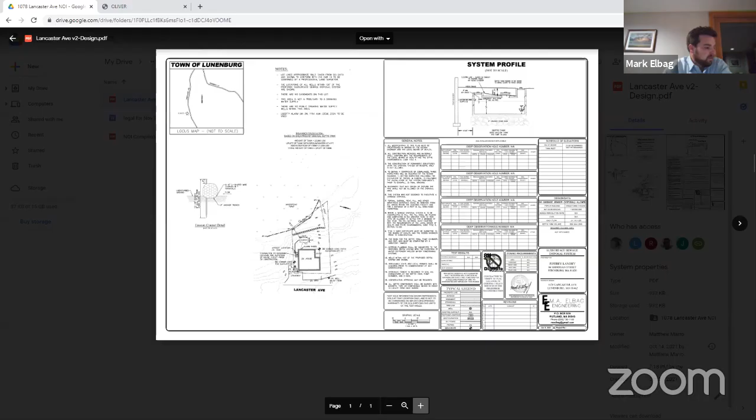It's converting basically a failed Title V system to a Title V compliant tight tank. There's really not a good alternative, and unfortunately the only feasible solution in this case is a tight tank. We kept it as far away from the resource as possible, being the downstream pond. As you can see, there's erosion control shown on the plan. We expect relatively simple construction. Really, the permitting is probably a bigger effort than the construction at this point in time. And I think the applicant's just looking to kind of get this going and get this under compliance.

All right, thank you. When are you looking to put the tight tank in? It's still with the Board of Health, but I believe as soon as possible. Okay, so you're gonna try to do it before the ground freezes up? Yeah, I think so. I think there's still that window. And like I said, it's very limited construction. It's really only a pipe and a tank. There's already a pipe with an existing tank that's undersized there now. So it's a relatively simple job. The hardest part about this job will be kind of access to the backyard.

The only concern I have, given the grade, is maybe try to beef up the erosion protection rather than just the one wattle line. That would be my only suggestion to back it up. We'd certainly look at that. It's all lawn area, and the tank's going in a relatively flat plateau in the backyard. But a second line of defense is certainly reasonable. That's my only concern as we're getting into fall, sometimes we get fairly heavy rains.

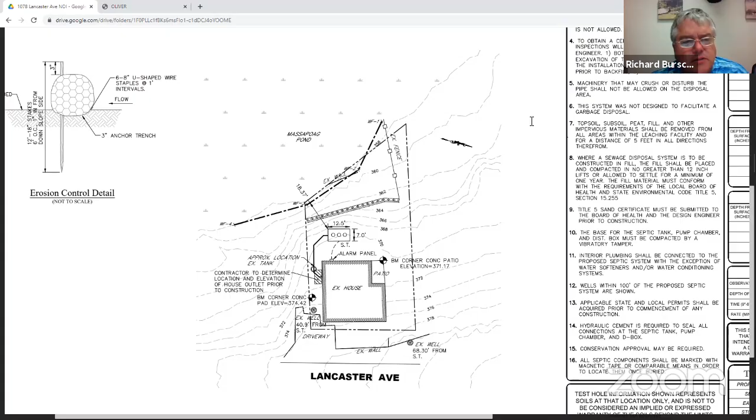Seeing none, I'll accept the motion for approval for the tight tank with an added condition of 12-inch wattles and silt fencing, staked and buried behind that. Do you make the motion, Jack? Okay, yes, I would so move. Do we have a second? Second. Mike seconds. Any other discussion?

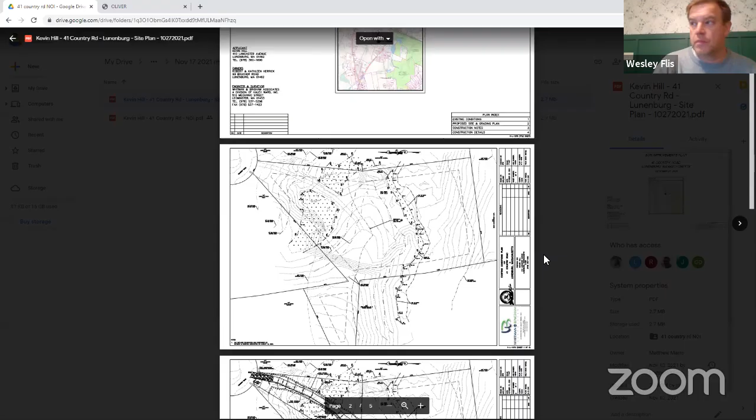You want to start with the site? Sure, we can do that. The site is a 2.57 acre property located at the end of Country Road on your left-hand side as you come up to the end of the cul-de-sac. Majority of the site is wooded. There are some wetlands that cross through the property, and also a perennial stream in the southerly portion, surrounded by some wetlands. Because of that, we have the 100-foot inner riparian zone and the 200-foot outer riparian zone, and also the local wetlands bylaw we have to abide by, being the no-touch zone, but also the 50-foot no-build zone.

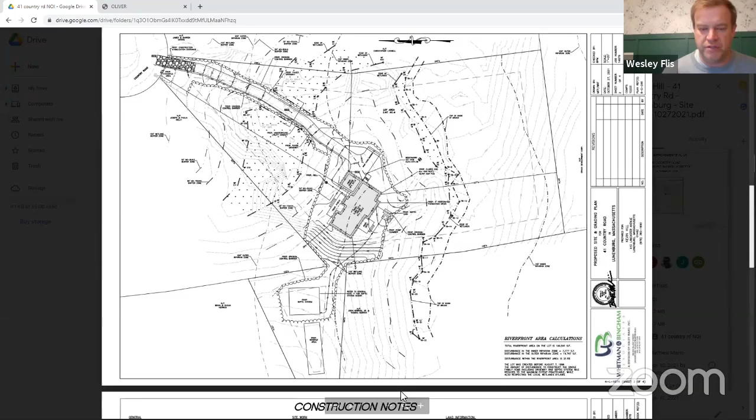So when looking at the project, what we tried doing is siting the project such that, other than just getting the driveway across to the uplands, we tried to meet the local bylaw with regards to the 30-foot no-touch and the 50-foot no-build, keeping impervious surfaces out of the 50-foot no-build zone as much as we could, other than for the driveway, and keeping that disturbance as minimal as possible. To do so, we did have to show some work within the 100-foot inner riparian zone and also the 200-foot outer riparian zone.

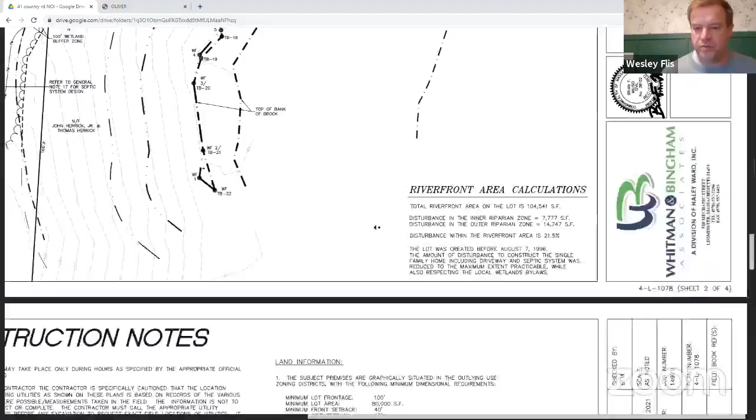The total riverfront on the property is 104,541 square feet. Within the 100-foot inner riparian zone, we're looking at disturbing about 7,777 square feet. In the 200-foot outer riparian zone, as you can see on screen, it's 14,747 square feet. Total disturbance within the riverfront is at 21.5%, which exceeds the 10% threshold, but is within the Riverfront Protection Act.

The lot was created prior to 1996, actually in 1977. There was an ANR plan that our former office did back in November of 1977 that created this lot. So this lot was created well in advance of the 1996 timeframe that DEP has.

On the plan you can see we show the well. We're showing the well within the 100-foot buffer zone, but out of the 100-foot riparian zone, within the 200-foot riparian zone. The septic system is up in the funkier shaped part of the property, where we were trying to get that out of the 100-foot buffer zone, but that will be in the 200-foot outer riparian zone.

We will have to pump up to that, so you can see in the back of the house there is the septic tank, but also the pump chamber. We're again trying to keep that out of the 50-foot no-build zone, but also keeping any disturbance out of the 30-foot no-touch zone in the back of the property, also associated with wetlands back there. You can see we show as minimal disturbance as we can associated with the house and utilities.

This is similar to the way the provisions work within the Wetlands Protection Act with regards to lots created prior to 1996. The way it's worded is: notwithstanding the provisions of 310 CMR 10.58(4)(d)1 or 2, the issuing authority shall allow the construction of a single-family house, a septic system if no sewer is available, and a driveway on a lot recorded before August 7th, 1996, where the size or shape of the lot within the riverfront falls under 310 CMR 10.58(4)(d)1 or 2.

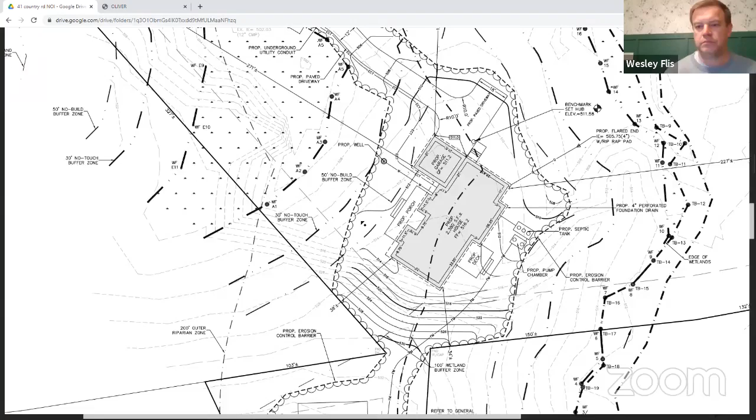There are concerns. Essentially, the first is the intermittent stream. There was a pipe underneath that drive area, the intended drive area, and the stream was flowing. We're interested to see how you plan on handling that in terms of erosion controls, and what that pipe will look like, because we are not looking to touch that pipe.

We're not looking to do any real grading over that crossing. We're looking to keep the grade of that crossing the same as it is now.

Right. So you're putting gravel on and some tar over that, but you're not going to interfere with that pipe at all? That's the intent there - not to touch that pipe. Okay, so you're leaving it intact.

Okay, yes. The next question was - we went further up the hill and ran into the tributary of the Mulpus Stream, and it was running very well. I'm interested to see how close you're going, since we've got a 200-foot buffer, right? I'm not totally able to understand your map, and I'm not seeing the river located on your drawing.

So we show top of bank shots - you can see TB2, TB3, all the way through. Top of bank? Yep, that's the river. So that's the edge - that's the project side of the river.

And so that's what we had flagged. We also have the wetland flags associated with the top of bank, which is closer to the development. Off of the wetlands we show the 30-foot no disturbance zone, no touch zone, and also the 50-foot no build zone. So where's the 200-foot?

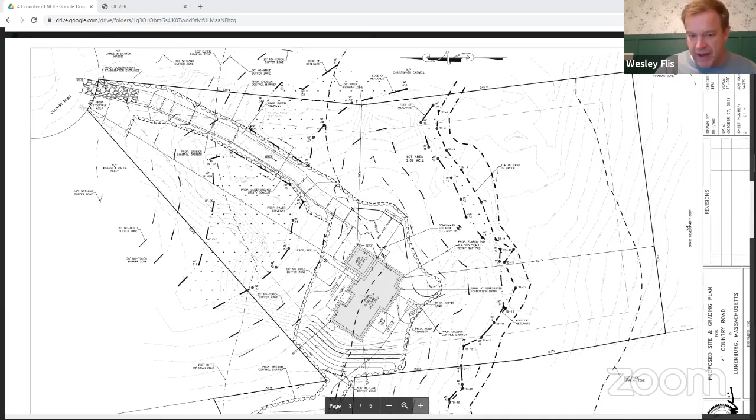So what we were looking at, if you're walking the property on the back of the house, there's a ridge line that separates where the back of the house is from the stream. So when we're looking at siting this house, you can see we're proposing a swale in the back of the house.

And so what we were trying to create there was similar to what it talks about. So the wording on the section here is proposed work which does not meet the requirements may be allowed if the applicant can provide an undisturbed vegetation with an overall width or length of 100 feet.

And so what we were trying to provide there was a swale of a length of 100 feet from the back of the house to the stream. Because there is that knoll in the back that we're not looking to cut down, it's actually going to create a swale of 100 feet for that water to have to run before it reaches the stream.

So yes, we are doing work within 100 feet of the stream, but there is still about a 100-foot, if not greater, length of run there in the back of the property for that water that comes off the back of the house to run before it reaches the stream. So that's another thing we're looking at in the back, to create that swale to provide for that.

So I'm most sensitive, and I'm speaking for myself, not for the whole committee. I'm most sensitive to the mulpus itself. And at the same time, that intermittent stream does eventually join up with this particular part of the mulpus stream.

If you can somehow look at turning it sideways a bit, I wouldn't have a problem with you going into the 100-foot on the left-hand side. I would consider that because I think it would have less of an impact.

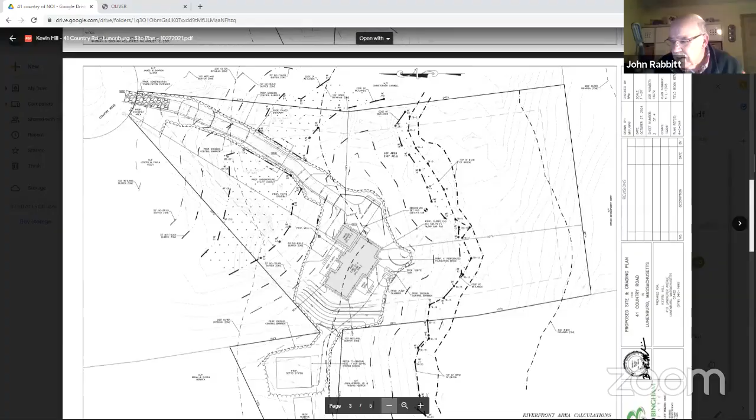Say that again, Mike? There was a dumping site either on the right-hand side of this property, or had I crossed over to the other side? Is that something you're familiar with, Wes? I'm trying to call it up now, and I don't know.

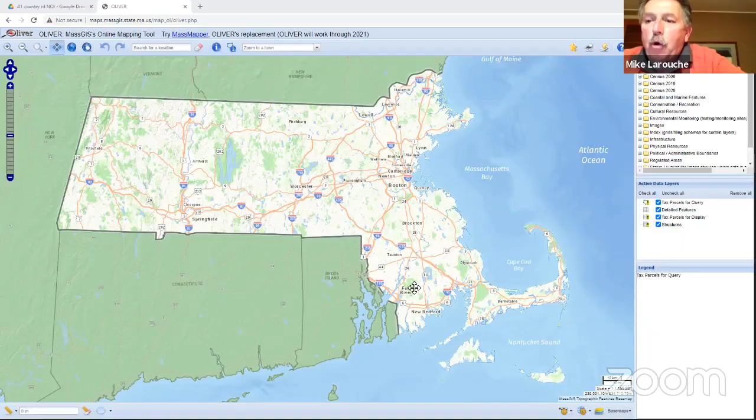Yeah, it doesn't show up. There was some old trucks that are all rusted out and tires, and it looks like it's been a dumping ground for a long time. So I was just curious to see if it was on that particular site, given that some of the markers were not that clear on whether we had gone over through the far site or whether or not it was on that site.

Hey Rich, I can give you pictures if you give me the screen. I don't know if I'll be able to return it to you, but...

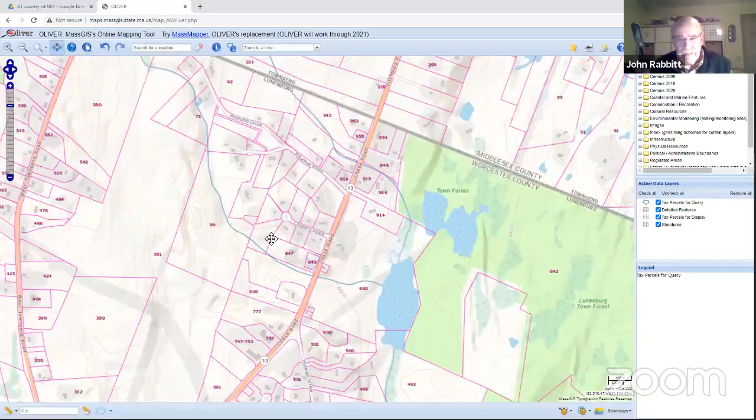Is this what you're talking about here, Mike? Possibly. Was it that close to the road? It was closer to the Mulpus, so it would have been out on the stream side? Yes. Okay, I'm not seeing much, and I don't remember, it's tree covered.

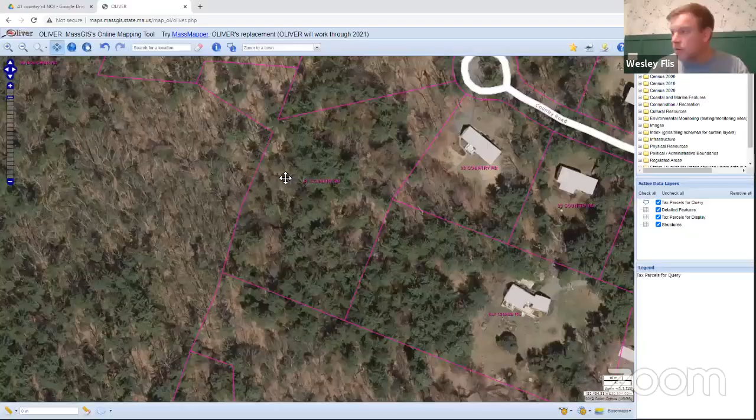Something we can put in as a special condition also, if we move forward tonight, any dumping or debris to be removed. Yeah, I don't think the client would have an issue with that.

So you think it's out in the back here, Mike? Because this is Mulpus. Yes. If you're looking at the building, I thought it was on the far right side.

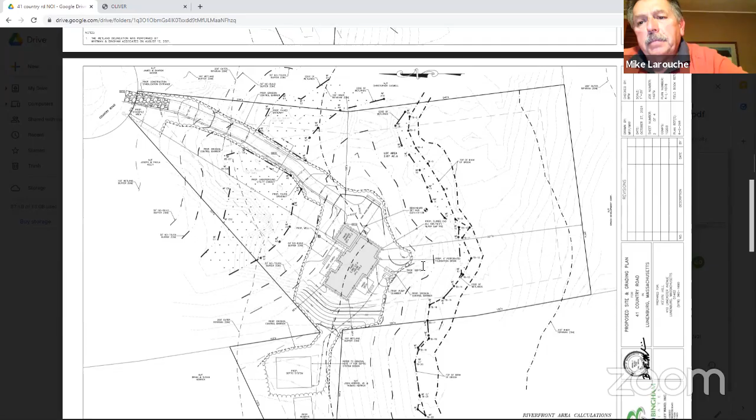Was it flat or was it hilly where you saw him? Just because it's a fairly good grade going up here and then dropping back down. I think it was right where it started going down. Okay, it was, Mike. All right, we can make a notation if we move forward.

Hey Wes, I did have a quick question on the house. Sure. If we took the garage, slid it east, and then took the house and slid the house so that the garage would be on the end of it instead of on the side of it, that puts the majority of your house in between the 50 and the 100-foot riparian.

Yeah, some of it. There is a porch on the front there, though. Now, is it a covered porch? What are we looking for here? It is, there's a roof to it. Okay, so we'll probably eliminate that and just have the stairs going up to the front.

Yeah, I'll have to. I don't know if, because that would alleviate quite a bit of the angst, I think, if we move it, it looks like we can probably move 15 feet. And at 30 feet, that's about what you've got in the riparian zone in the back.

Or at least some deck of in it, yeah. Back, is the deck in the back going to be covered? No. Okay, so I personally don't have anywhere near as much of a problem with an open deck in the back in the 100-foot inner riparian.

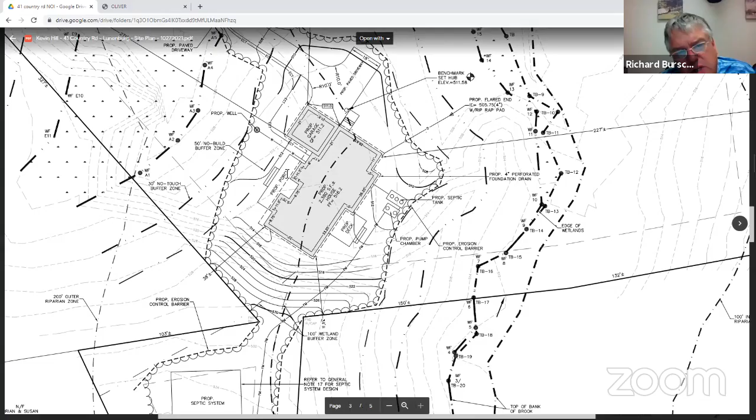Yeah, but that would move quite a bit. That moves the tanks back in a bit. You can move your edge of disturbance back in a bit. And that really alleviates quite a bit in the 100-foot, and move right up to the 50. Because at least at that point, you're still outside of the no-build zone. But that certainly gets quite a bit of it out of the inner riparian. Right, so that would be my suggestion.

Okay. Katie, we have not heard from you.

I was just curious, I know it's a fairly wooded site. I was just wondering, Wes, ballpark how many trees you are removing, and if there is a replanting plan in effect yet. I don't know the number of trees. In regards to the replanting, I'm not sure. I said we tried minimizing as much as we could, but where the septic system is, there will be no other trees planted.

That slope on the back of the house is going to be fairly steep. Yep, so there won't be anything planted there. So if anything, it would be over on the side of the house that maybe a couple of trees would be planted. But at this point, nothing's planned. Like I said, most of it's going to have some slope to it, so it's going to end up being grass. Okay.

Matt? There's no work proposed in the 30-foot, right? You're not expanding that driveway in? Just the driveway coming in.

We're changing the grade after where basically the wetlands end. We're changing the grade there, just steepening it up a little bit on both ends. Okay, but you're working within the existing right-of-way? We're looking to work within, and then obviously we got to get the conduit, the electric and telephone and so forth out there. Right, but that's going to be within the existing right-of-way.

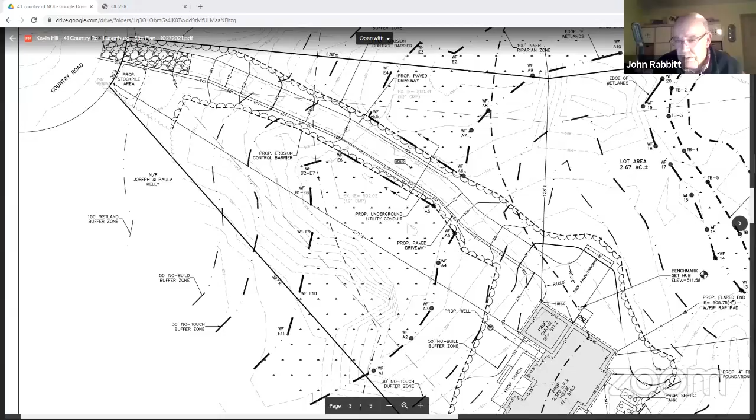Mr. Chairman? While we're waiting, I like what you're saying about flipping around a little and moving the garage over. The tanks, I don't think they have to be there. You could move them to the other side of the house, not on the full side. Take the tanks out of there, there's no disruption, and you're outside anything showing up in terms of the 50. You're talking about putting the tanks here on the west side? That'd be correct, yes.

You're pumping it uphill no matter what. Yeah, you can certainly ask him. When he comes back, he'll be back.

Well, I would assume part of the reason for the placement of the tanks would be for what's proposed for the interior structure of the house. So the way the rooms and bathrooms are situated, plumbing is usually centrally located. So moving that might be impractical, you'd probably wind up redesigning the whole house, which would change the whole configuration. I'd be more looking to maybe sealing off the land in the back.

Well, I walked that site, Matt, we're moving around the area he's working in, it's pretty decent. I wouldn't want to see the house move closer to the wetland in the front because in front of the stone wall there's a scattering of American chestnut trees, which aren't rare, but aren't common around Lunenburg, not that I've seen anyway. Not the American variety anyway. The back area tends to slope down more to where I saw the blue flags for the high water mark.

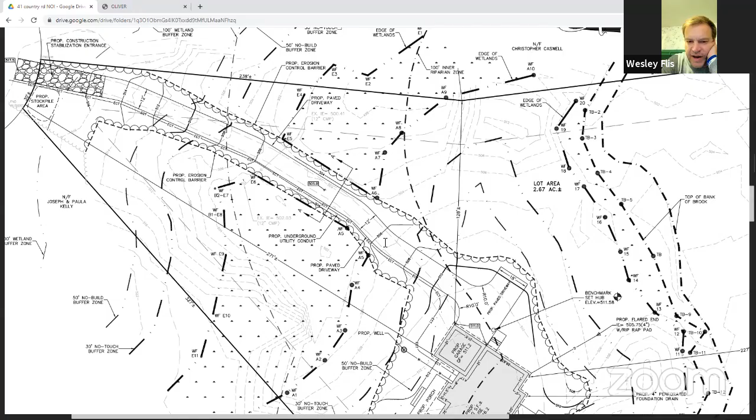I didn't even think of that until Katie mentioned tree replacement, and that would apply to the 30-foot. The only area I'm saying you might have some limited cutting would be where the driveway is. Correct, and that's what I wasn't sure about. Like I said, the existing driveway is narrower than what we're proposing, we're proposing a 12-foot driveway. So I'm just not sure if we can get away with trimming some of the canopy to get some of that in there, at least to get the work done without touching any of the trees, and then let it grow over the driveway as it goes.

If I was going to do planting replacement, I'd probably want to do it in front of the stone wall here, around where I saw the chestnut. And I'd probably want to do it in the front over here on this side of the wetland where the canopy thins out a lot, it's naturally thin over here. I think you could probably do some scattered plantings without worrying too much about competition. The area in the back by the stream is very heavily canopied, I'm not concerned about that area.

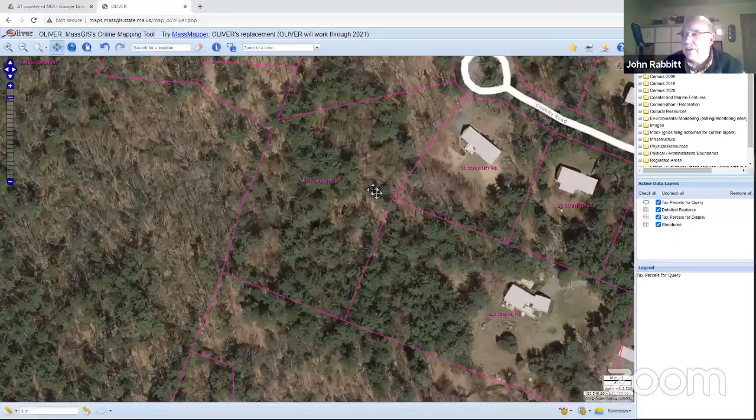And this is where the house is going, right? Mr. Chairman, while Wesley was away, we made a suggestion specific to moving the tanks out of their current proposed location to essentially up on the other side of that. Well, it could be on the other side of the house, or a little further uphill, but getting them out of that 50-foot, 100-foot riparian zone.

So we'll move the tanks over some and relocate them, is that a possibility? We can take a look at that, I'll have to look at the slope there and see if we can. I know we have cover requirements, so I'm not sure if we'll have enough room there to put them on the closest side to the slope. Yeah, or you could stick them in the front, one or the other, but essentially get them out of that zone.

And that way we won't be digging that up. That could be a problem if you stick them in the front, Jack, because if he does move the house, now you're gonna have to pull them up. So essentially keep them on the side there. See if you can do that, Wesley.

And are you fine with them being... I was trying to keep them out of the 50-foot no-build, but we might be able to throw them in the front there in the 50-foot no-build.

Yeah, myself I'd rather see them out of that, because this is the berm you were talking about right here. That's the toe of the berm, yeah. So if you're able to slide the house 15 feet that way, that's gonna slide these even a little bit further. And this is a fairly well protected spot where you've got the berm, right, because these are going down at 511, and you've got the berm up here at 512, 514.

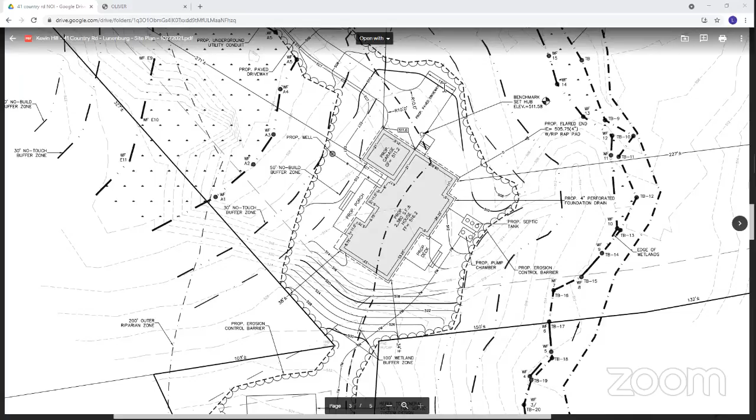I just got a text message from Jeff. I've sent him and resent him the links to this meeting that we all use to sign on. Him and Patty are also having trouble. I don't know if Nick Eaton's made it on, but I know he was having trouble signing on. There appears to be problems with some people signing on. Yeah, I see Nick here now, so apparently he made it in. So Jeff's just expressing concern as to whether or not the meeting should continue. I've let in 5 people and Wes has come back 3 times, so I know Paul Grands I let in, Nick I let in, Richard Tremblay I let in, Ryan I let in. So there's definitely been people coming and going. So I feel pretty confident it's probably a local issue with them. Okay, I just promised him I would relay the concern. Yep, and he's more than welcome to, he can always call in on his phone, he just doesn't have the video.

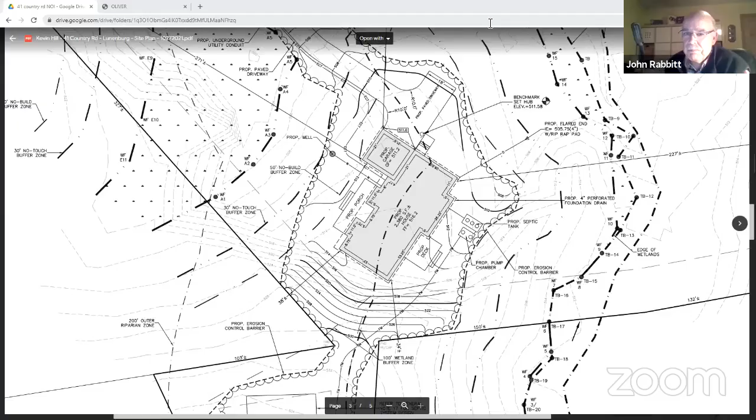Just to build on Andrea's comment, Leslie and myself, we're on the slope of a hill, and we put the garage underneath. We're 70 years old, and we are actively looking at pursuing an elevator, believe it or not, one story. That's all I need, taking me out of the basement up. But there are elevators you can put in and get installed for about $40,000, and it adds a lot of access to the house. So if you were to think in terms of multiple stories, that might work as well. In fact, you could get a bigger house in there, and put your offices upstairs.

Just my thoughts. Thank you, Jack.

At this point, I assume, Wes, you're going to go back and take a look at trying to squeeze the house a little bit more between the 50-foot no structure zone and the 100-foot riparian zone. Yep, I'll take the comments from the commission tonight back to the applicant regarding the house shape and orientation, and see if we can make something work so we can pull it further out of the 100-foot riparian zone and push it closer to at least the front of the house, closer to that 50-foot no build zone. And then also look at where those tanks sit, if we can move that house around a little bit.

Similarly, I'll let them know about the drive-under option and see if they're willing to do that also. I know there is some grade difference there, and I'm not sure if changing the grades will cause more disturbance or less disturbance, but we can definitely take a look at that too.

Yeah, I personally had thought about the drive under, but with the 5-foot difference between the height of the first floor and the height of the garage floor, it didn't look practicable. Or you'd have to add another 3 feet to the first floor.

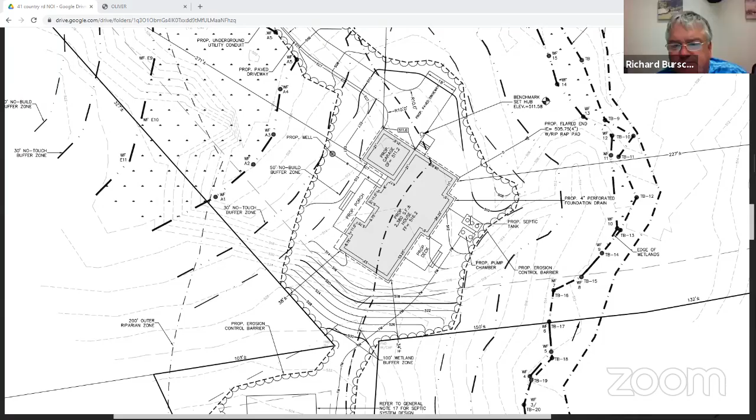That's what we were looking at too — it's one of those things where you start moving material around in the lot to make it work at that point. I think at that point, raising it up, you're going to get a lot more fill and grading around the house. Correct, so we're balancing disturbance in one area for disturbance in the other area.

All right, so at this point we'll let you go with the house reorientation, and then Matt's concern about putting the trees back out in the front or replacing what's taken out in the 30-foot no disturb zone where the driveway's coming in on either side of the wetlands.

So with that, with your permission, we'll continue this until — I don't have a calendar. Matt, what's the first December meeting? December 1st. So I will accept the motion to continue 41 Country Road to December 1st.

So moved. Second. We have a motion, we have a second. Any other discussion? All those in favor of the motion say aye. Mike LaRouche, aye. Childs, aye. Jack Rabbitt, aye. And I for myself.

Thank you very much, Wes. Thank you. Thank you, guys. Have a good night. You too.

All right, moving forward. Pursuant to Mass General Law, Chapter 131, Section 40 as amended, the Town of Lunenburg Wetlands Protection and Municipal Bylaws, a public hearing on a request for determination by Matthew Butterworth for the placement of a shed within the buffer zone at 1390 Lancaster Avenue.

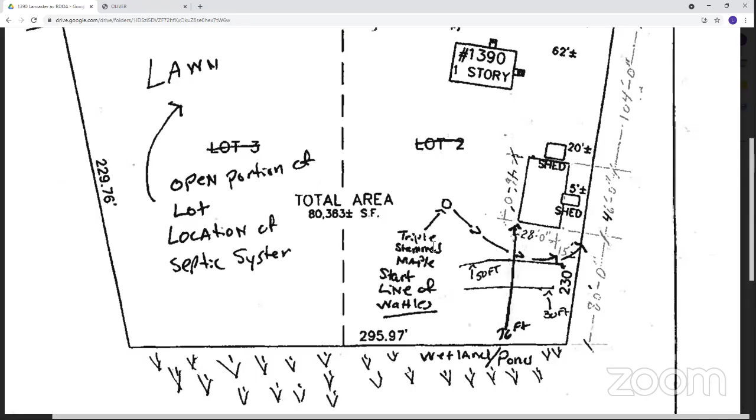So what you see here is based on the site walk that Mike LaRouche and I had. We did tape measurements in the field ourselves. So if you zoom in a little bit on that drawing, Rich, the circle that I have there, forgive my bad artistry, it's almost as bad as my voice right now. What you have is a triple stem maple that is right in the middle of a lawn area. And I recommended that he do erosion protection in the form of wattles.

The garage is actually coming up this way more here. And you have a little shed here that's going to be removed. You have a triple stem maple right here. So what I'm recommending is that for the triple stem maple, you have an arc of erosion protection going out to basically the property line. So in that section, it's rather flat, not a very heavy slope. So 6-inch wattles would do just fine.

You will notice on the plan it's divided into 2 lots, but they actually have one. It's actually 1 lot now, where I have lawn that's an open portion. The septic system is located on that portion of area. So it looks like they have one heck of a leach field out there.

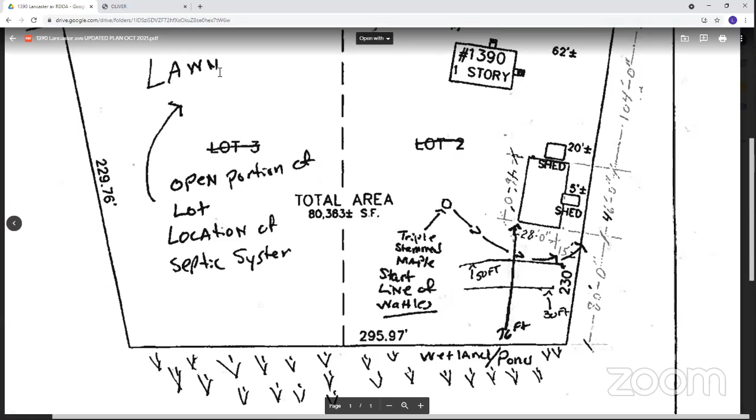Okay, there's 3 trees that need to be removed. 2 of them are out of the buffer zone. 1 of them is 96 feet. That one that's 96 feet would be, as you see, the box outline of the garage would basically be right where the corner is in the garage, the closest corner above the 76, where I have the 76-foot arrow drawn. Mike and I measured those trees as well, just to see the distance. So the closest one is 96 feet to the wetland, the remainder are out of the buffer zone. I think Mike can confirm the measurements that I'm saying. And with that, I'm going to stop talking because I'm going to start sounding like Darth Vader's kid in a minute.

One quick question on the garage. Is the entrance going to be from the Lancaster Ave side? Yes. Okay, so there's not going to be any doors on this side? Other than maybe one walk-in door for the shed. An entry door? Okay, but the garage doors will be on the 28-foot side out here, correct? Yes. Okay. Any other questions from commissioners?

Any members of the public have questions on 1390 Lancaster Ave?

Before Matt gives the determination, I'll ask that you get the plan you and Matt have drawn up and agreed upon signed and dated, Randy. This is the plan that was approved, so we can go back to it at a future date and make sure everything lines up. All set with that, Matt? I will accept a motion for a negative determination to be delivered to the applicants upon receipt of a signed and dated plan.

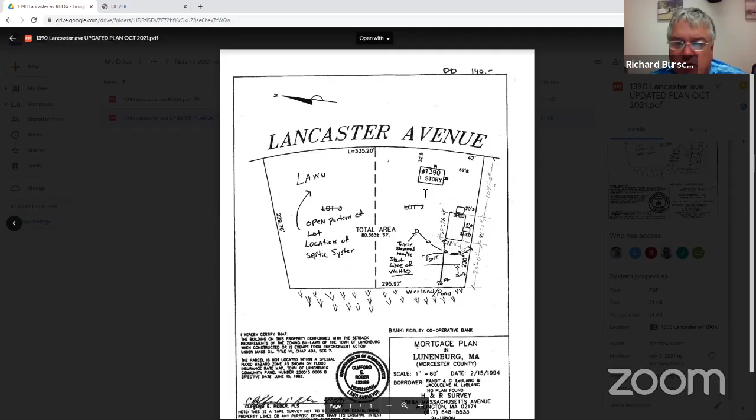So moved. We have a motion by Katie and a second by Mike. Any further discussion? Roll call vote: Mike LaRouche, aye. Katie Childs, aye. Jack Rabbitt, aye. And I for myself. All right, thank you very much. Thank you, everybody.

Moving forward, pursuant to Mass General Law Chapter 131, Section 40 as amended, the Town of Lunenburg Wetland Protection and Municipal Bylaws, a public hearing on a request for determination by Brian Minor for the demolition of a screened-in section of a single-family home with rebuild of an addition within the buffer zone at 35 Peninsula Drive.

Do we have an applicant present, Matt? Hi, I'm Ryan Malyar, co-owner of 35 Peninsula Drive with Brian Minor. I'm also here with John Tarlack, who's Brian Minor's father.

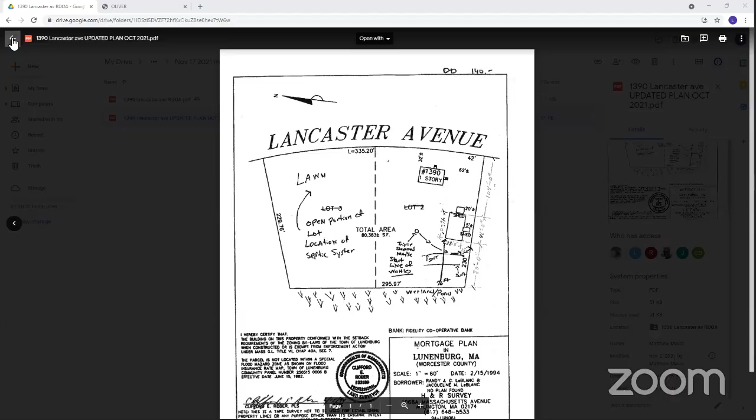Rich, I believe you have the PDF of the email that I forwarded to everybody because I couldn't get it to the cloud. Let me just go back and take a quick look. Let's try site visit part 1, Rich. You think that might have been it. When I first started doing the reports, I put them all on one email and loaded them. Now I'm doing them independently with the Word document. It's either site 1 or site 2, but I'm pretty sure it's site 1.

Is the picture showing up? I've got it, yeah, there they are. Photos, okay, go to the far left. Pictures. Okay, oh boy, yipes, okay, so go to the left one, Rich. Yeah, yeah.

Matt, there was some verbiage with it. Jack, it looks like Rich's email system is working a lot better than the one Lunenburg gives me. By the way, just for the record, we're switching to an Outlook format. Let me see. Let me look for your narrative.

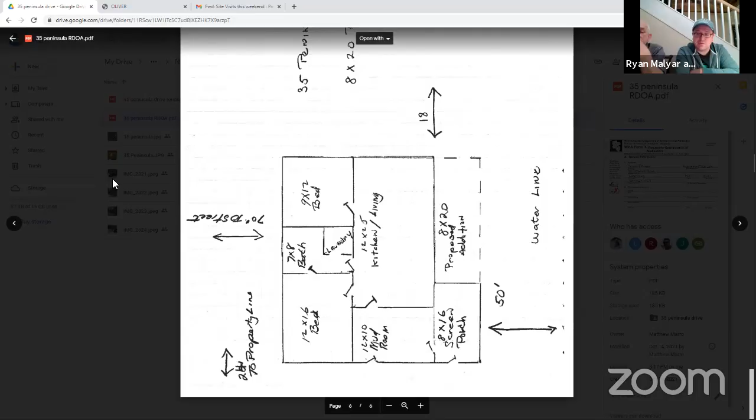So at least from the eyes of the current regulations, you can rebuild the screen porch because that is currently existing. But the additional structure you're trying to put here would be within our no-structure zone, which would generally eliminate the ability to add a structure there.

I had some pictures of it. All right, so you're saying, Jack, this green line here is actually about 50 feet? That's 50 feet, and the screen house, which I didn't show, is essentially 37 feet existing right now.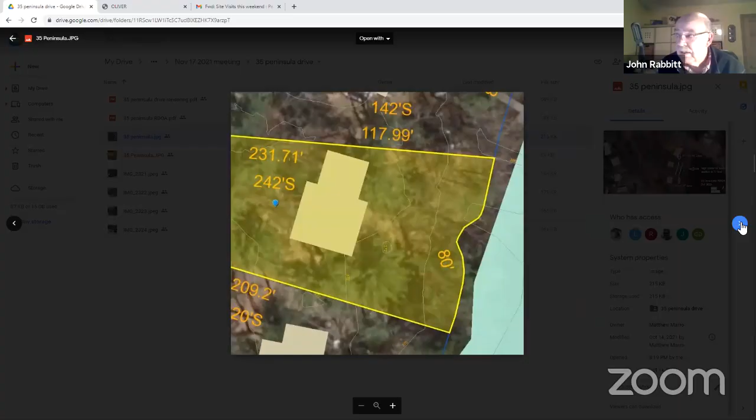It was 52 feet to this section of the house, correct. And the front of that porch goes out 37 feet to the water's edge. Is it a porch slab that the porch is on? Yes. So, that's an existing structure, so that can easily just be permitted and replaced, because it has a solid roof on top and a concrete base. It can be redone in place.

But the problem's going to be allowing this added part here, at least on the front of the house.

I don't know, Jack, if you guys chatted at all about any possibilities for the house. We did not, because that gets toward discussion, which we're not allowed to really have. There were some options, I believe, in terms of if they wanted to put some sort of patio out there without a cover, permeable. But I purposely tried to avoid that because I don't want any conflict of interest or open meeting law violations.

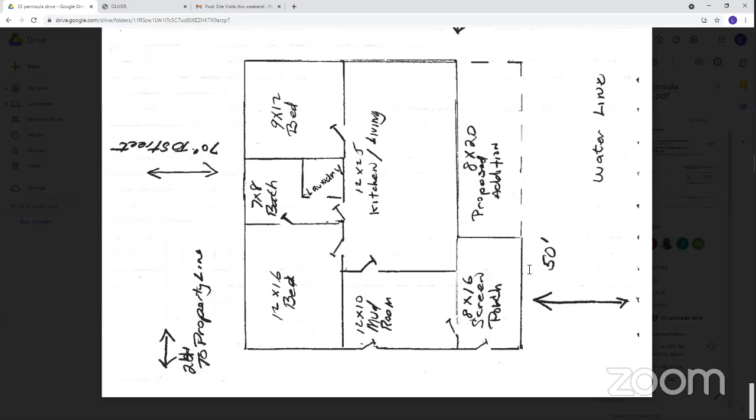Can you put that picture up again? I don't recall that proposed area being disturbed. It looks disturbed to me. It's just kind of dirt and there's no trees there. I could be wrong, but it's not really - I shouldn't say disturbed as in paved or anything, but there's no trees existing, no lawn. It's just kind of dirt.

So you would support increasing the impermeability, Katie? I guess when you put it that way. Sorry, I'm half asleep right now. No, that's okay, that's what we're all about. I've had a long day. No, you make a good point, Jack.

Yeah, no, I would not be in favor - you're correct, I would not want to increase the impermeability of that area. Yeah, you are correct, thank you. I'd be enough - no, Katie, I do that all the time, don't worry about it, I'm not fully awake right now.

All right, so as you've presented it, it looks like you can certainly add on to this side of the house. No, that's bordering too close. Would we have to get permits with our neighbors or, I don't know? Yeah, it's too close to the neighbor's lot line, there's not enough room - setbacks.

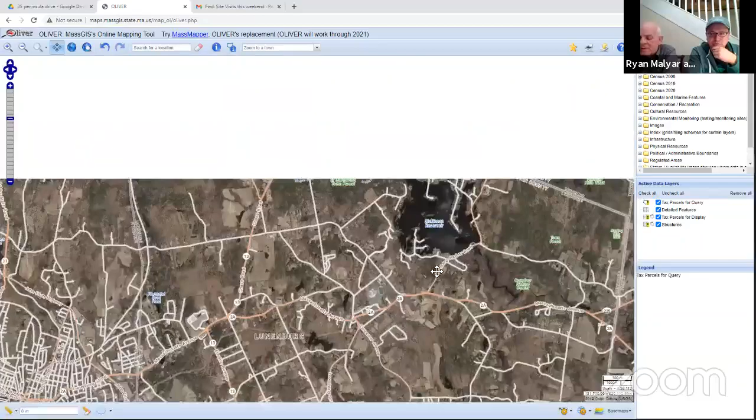And have we cut down any trees looking into this area? We're not looking to go any closer to the water line, the high water line, and there's already a slab there - that's an existing foundation of impermeability. We're just looking to extend to the right side. You can't extend to the right side, that's going to be even closer to the high water line.

I think you had it, Rich. 35 Peninsula. Yeah.

So can we do it on the other side? Unfortunately, it looks like - did we cut down some trees in this area? Because I don't even see the house. And I know that house has been there forever. No, there's two houses on the lot. Go down a bit, I think it's... I don't know.

It should be right there. Yeah, because this is 35. No, maybe it's 39. Yeah, that's 39. Okay, why did I say 35? Because that's what the agenda said. Okay, good, 35 - yeah, nope, 30. So you do have quite a bit of space out in the back, or... That's going right to where our septic is if we go towards the back. Okay.

Well, I'm open to other suggestions. Unfortunately, I know myself, I'm not really big on adding into the no structure zone.

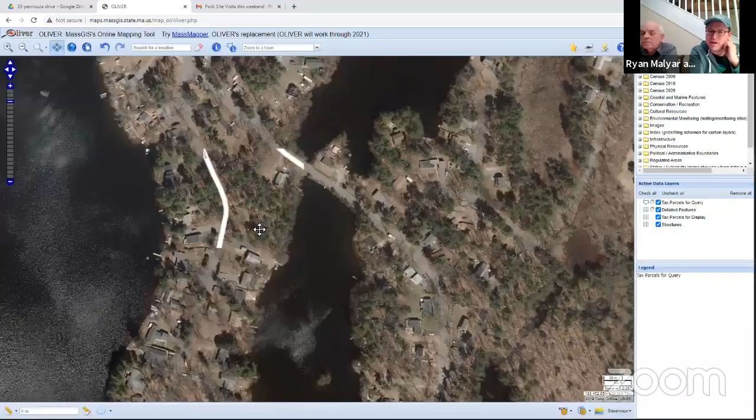We were optimistic here, having taken many kayak rides around the lake and seeing so many properties that are right there on the water, coming up to the water's edge. Here is a camp with a very small footprint built in the 1950s, and we're trying our best to bring it back to life, a property that hasn't been touched since it was built. We're just trying to make it a livable space with an 8x20 addition. We were really optimistic here.

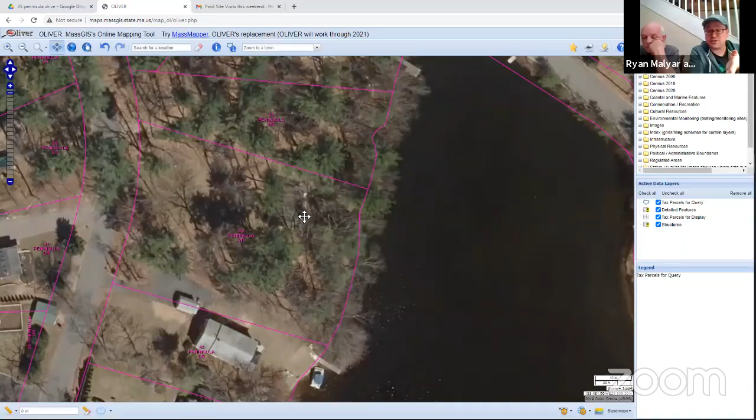I'm open to other suggestions from commissioners, or at this point we can continue and you can work with Matt a little bit to see if we can come up with some other ideas. Because I know we can, it's 52 feet, but a 2-foot addition isn't worth the hassle.

The other option I see is we have 128 feet here that we can try to add the 2 feet you've got, and then take some of that square footage and add it in as well. You're talking about decreasing the slab, the 8x16 screen porch area, and adding... decreasing that so we have a net zero of impervious surface added in the no structure zone.

Yeah, it almost doesn't make sense. The 8 feet, if the slab's already there, would have to... Mr. Chairman, the 8-foot is pretty narrow. It'd be tough, but it could certainly add a beautiful deck area, an open deck area. Well, it's just the reason for the addition, because the actual living space isn't quite that large.

And that to accommodate the kitchen/living area, it's small as it is. That's why we thought adding the 8 feet out would help, and it's one floor, so it's a small living space. It's a classic 20 by 30.

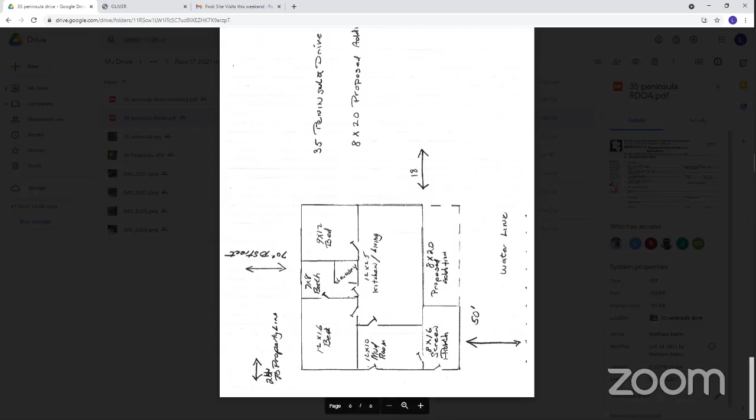Put it over there, and then just kind of put some kind of... as long as that stays, they don't put a roof or anything over it. They could put a deck where it says screen porch, and then proposed addition, they could put an addition, I would think. Yep, yeah, good idea. So that is an option. You can get an 8x16 off of the kitchen and then just have a patio here.

I think we're better off if we get approval for the 8x16 that's already there. It's got an existing slab that's already at the same level as the rest of the house, and it's got a solid roof.

We would obviously change the roof pitch to match what's already there. So instead of running in towards the lake, you'd have it run away. Right, we'd have it run away.

That was the original pitch — the addition was going to mimic what's already there. We were going to take that so it would run off to the left and to the right, not towards the lake. So you're gonna raise the roof up this way.

Yeah, we'll mimic close to what's in there already. Do you understand what Jeff's saying? You could just take this whole room and slide it down towards the kitchen too.

I think where there's a little bit of a mudroom, we may be able to fit the kitchen area into that, and that takes the kitchen/living space into the 12x25. We can leave that as living space and make the 8x16 part of the kitchen.

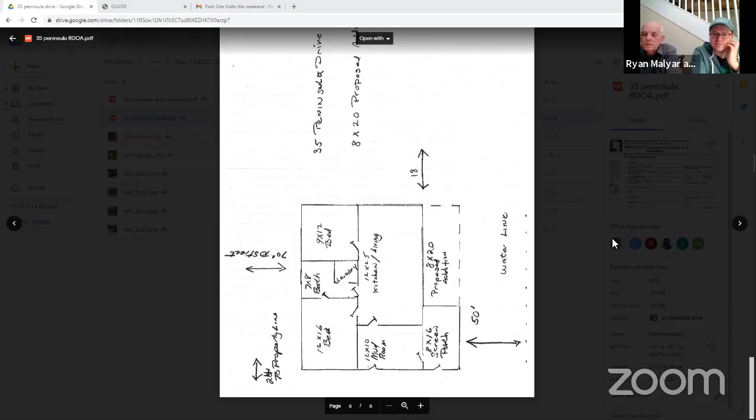Thank you. Moving forward, I'll accept a motion for negative determination on the rebuild of the 8x16 screen porch and a denial of the proposed addition. It was a positive, not a negative, for the rebuild of the screen porch. Oh, negative means that it's not in violation of the Wetlands Protection Act.

Oh, thank you. Reversed — strike that, reverse. It's backwards from what you think. Yeah, it'll take us all a while to get used to that one.

So I will accept a motion to that. So moved. We have a motion and a second from Jack. Roll call vote: Mike LaRouche, aye. Katie Childs, aye. Jack Rabbitt, aye. Jeff Viviano, aye. And I for myself, aye.

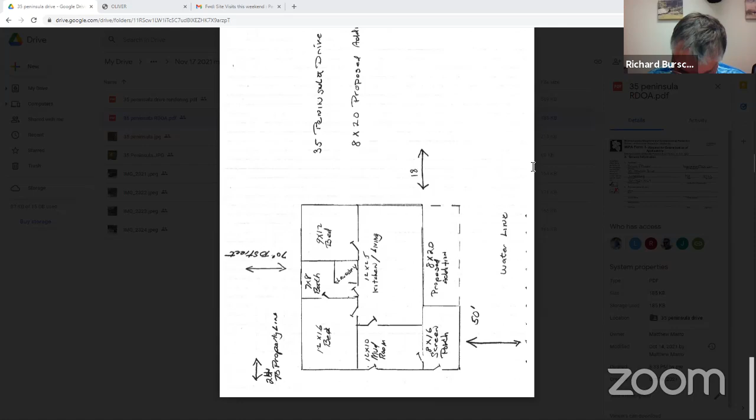Moving forward, pursuant to Mass General Law Chapter 131, Section 40, as amended in the Town of Lunenburg Wetland Protection and Municipal Bylaws, a public hearing on a request for determination by Ray Clouthier for the reconstruction of an existing footpath and placement of a temporary screen house within the buffer zone at 37 Pearl. And I see Ray is here.

And I believe there was a site visit done. That's correct. Do you want Rich to bring us up to speed with the same pictures that you had?

They're in there, probably starts to go to the third one over, second, third over. Yeah, again, I didn't realize you couldn't separate them. No, the wrong house. There you go. Okay, what we had observed.

Rich, I was able to put that one on the cloud too, by the way. Good, excellent, thank you Matt.

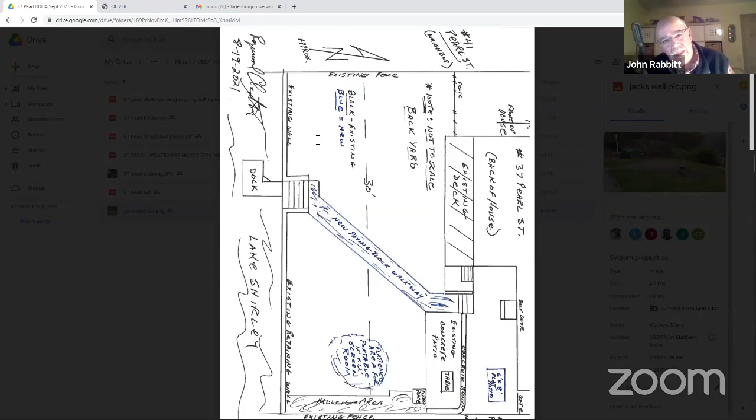So yeah, there's the shed as well. And where is the shed now? If you were looking, coming down the new pathway, and if you go to the top of the screen, or to the left of that, there's a shed that's sitting right up towards the edge of the property line, right in there.

Okay, when did that go in? You'd have to ask. That was just about 2 years ago. Okay.

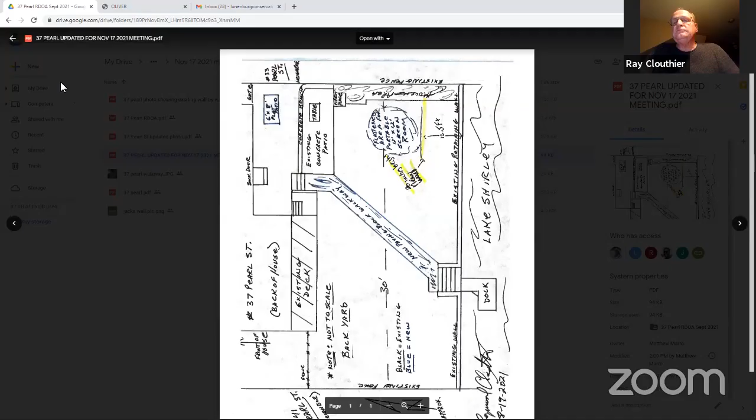And do we have that on a plan? No, it's one of these plastic, I don't know how to describe it. It's a little plastic shed that can be emptied out and picked up and moved, I guess, if it has to be moved somewhere.

Did you verify the dimensions, Jack, on the 30? You said yes, Mike and I. 28 was here, the dimensions, okay let me see where you've got, that's the flattened area. There's a wall now in front of that flattened, newly flattened area. And that distance from the wall to the front existing retaining wall was 12.5 feet.

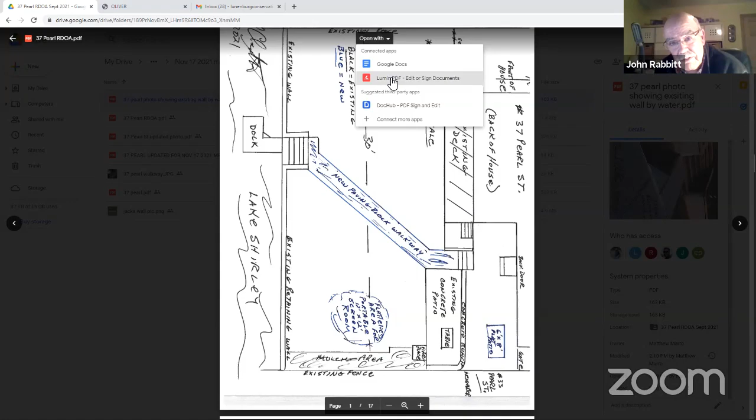I believe that's a new wall as well, sir? Yes. And then the distance to the back existing, the graded area, was 28 feet. Did you happen to go back here? We did not, we only measured to the back end of the grading.

Okay, I'm pretty confident that the existing patio is outside of the 30. And I believe the other wall has been there for quite a while, the back wall. The wall on the right of that picture, right up against the water, has been existing for a long time, yes. And the one that's closest to your house as well, those have been there for quite a while. Yes.

Okay, the entire property, the grass area is, I don't know, 30, 35 feet total. So we tried to find the best and flattest area to put up a screen room, basically, to sit out there without the bugs, and that was the only spot we could do that.

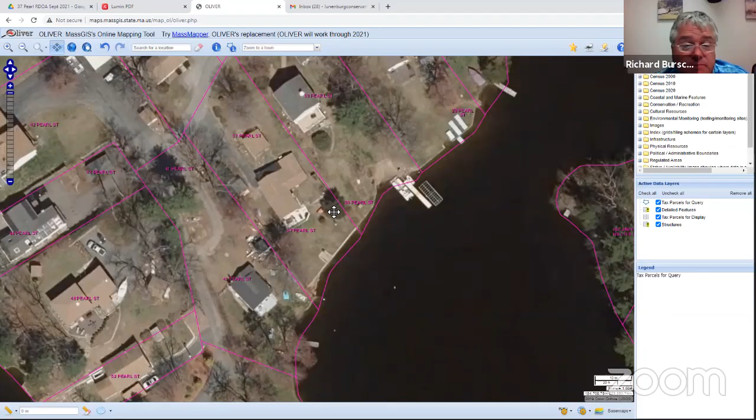Well, I think with just some minor regrading, you can get this flat enough if you wanted to put a screen hut on it. I don't have a problem with that, but unfortunately the wall doesn't want to be there, and where it's a violation it can come out. I think with just some minor grading and seeding, right, you can flatten out the upper area there. And again, you can put anything you want on top of the concrete - that's not an issue there - and then get the shed back 50 feet.

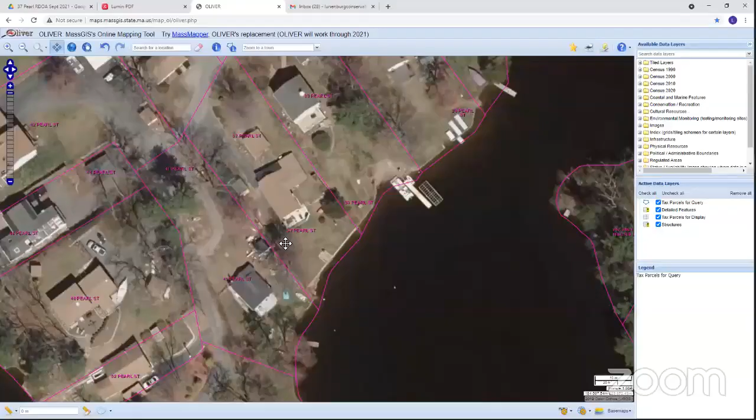Mike, do you have anything to offer? I think those are real reasonable recommendations. Thank you. Katie? Yeah, I think they sound good, good recommendations. Jeff? Oh, that all seems fair to me.

Is that everybody? Katie, Matt, Jeff? Matt, did you have anything to add? No, I agree. The wall could come out - it's not like it's a huge structure. He's going to have to grade anyway, so pull the wall out and do everything else. I think he'll be fine.

And Jeff, glad to see you - I finally got the sign in. Yeah, not sure what was happening there.

All right, so at this point, I think a motion for a negative determination to grade the area flat where he's looking to put the screen porch. Take the wall out, add soil as needed to grade this out. The area needs to be stabilized and seeded.

And remove this little section of walkway here, so you just have the main walk going down from the stairs to the water, and moving the shed 50 feet from the water. Does that sound like I've covered everything?

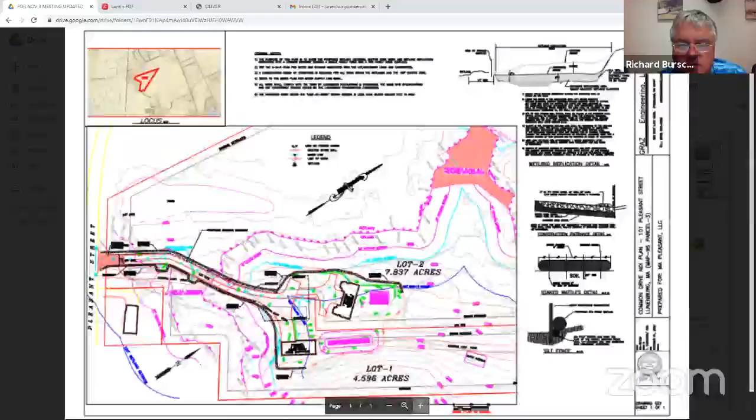Hey, we no longer have a 6-lot subdivision, huh? Well, we went from 6 to less - 4. And we were seeking, we asked for a waiver, actually 2 different waivers, in order to minimize our wetland impact. And we could not get a favorable vote from the planning board to reduce the right-of-way width to lessen our impact. So we went from a 4-lot subdivision road down to an ANR. The planning board actually signed the ANR last week, Monday night rather. So it's an ANR, it has a shared driveway coming in, it comes down the lot line as their regulation requires. So it substantially decreases the wetlands impact and all of the site work.

And what we have done here with this plan, in order to avoid the elaborate storm drainage system that we had on the previous set of plans, we have set this up to stay under an acre of disturbance. That way we don't have to get into the stormwater bylaw, which causes just a massive additional land disturbance in order to meet all the requirements. So that's it, we're proposing to do the replication. We had multiple replication areas before. We now just have one area, and it's in an area that's well suited to the replication - not a lot of big trees in there. Whereas before, our replication, as soon as we got into the site here, a couple 100 feet in, we were going to start replicating and we were going to have to wipe out so many massive 12 to 24-inch pine trees and things like that. Now we can just leave them alone, basically.

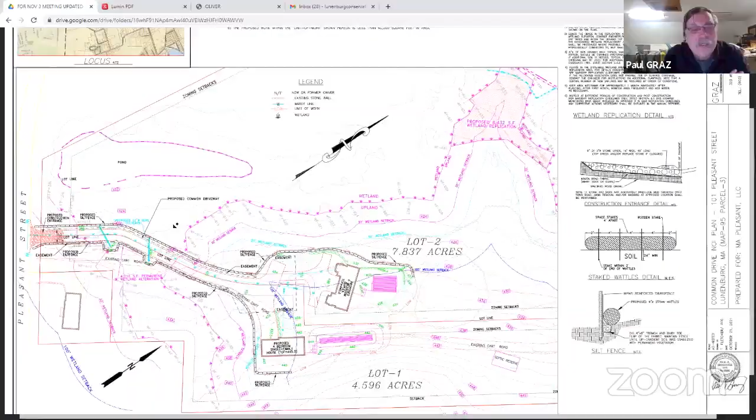The lot geometry is a little bit wacky because they have minimum lot width requirements, so we basically had to put a little jog in the property line north-south. So the property line comes down the middle of the common driveway, and then it turns south right there, and then it heads out to the east, out towards the back lot line.

We're going to put a couple of culverts in to maintain the water that wants to seep through - it pretty much seeps overland from the wetlands on the southeast side to the northwest side. So we've got 2 culverts going in there. There is a fair amount of sheet flow down off that hill - it ponds up behind the existing house, and then it just goes overland.

Okay, do we have any elevations? I think I see them - these fluorescent green spot elevations. The proposed grades are hard to see, it's a light green but the labels are dark green. So the spot grade at the culvert is 426, and right at the next culvert, the next cyan color, it's a 430 contour going over the road right there.

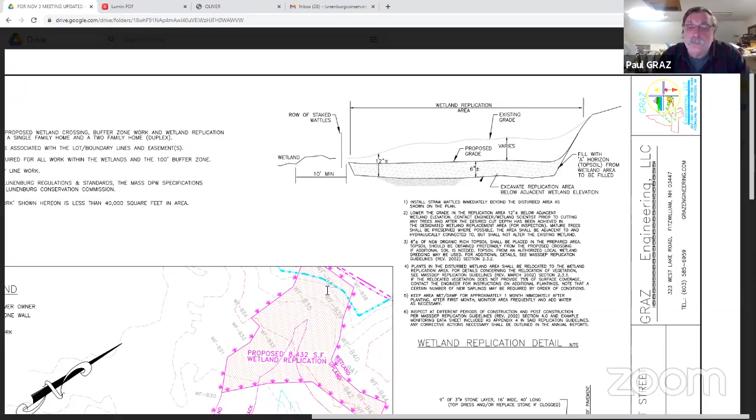All right, can we get an update of exactly what you're putting in here? Because I do see mention of a wetland scientist, so if we can get an inventory of the plants in the area to make sure we're putting back plants of the same genus and species as exist now. Yeah, I did an inventory back at the end of August, first of September - it was 7 pages, which included everything we were going to do. Yeah, Rich, there should be a file in there that says tree inventory. Now that's trees though, not the planting schematic - that tree inventory shows where they are, and of course there's less disturbed area, but we're still going to be replacing those. But I want a planting schematic for the wetland itself.

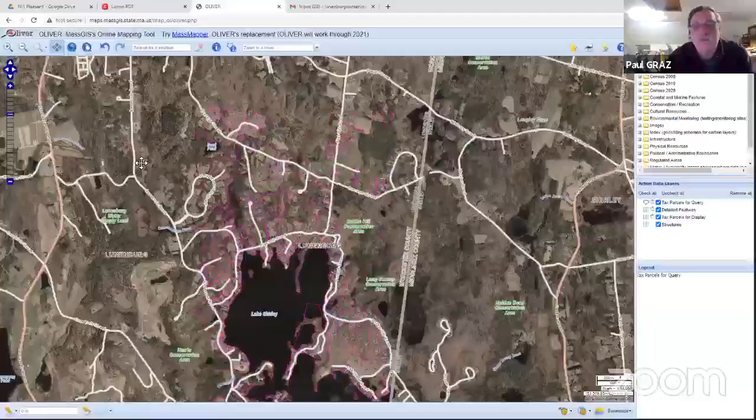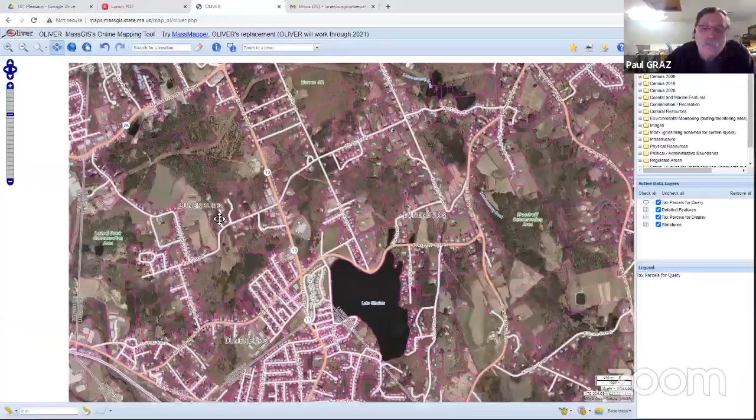Oh okay, yeah, because right - I believe over there it's a little more wooded, it's not just... let me zip over there quick. That's correct, yeah. So I'd like to see a planting schematic of exactly what you're putting back in there, to make sure that what you're putting in is similar to what is already there.

Yeah, because it looks like you're putting it out in this area here. But if we can get an inventory of what's there and then a planting scheme of what you're putting back, that would be my biggest concern at this point.

And is there any way to slide this lower building somewhere off of the 50-foot setback? I could probably move it a few feet to the right.

I could maybe juggle it around a little bit. I was just trying to stay under that 40,000 square feet, or the 1 acre rather, of disturbance, but maybe I can pick some up on the back side of the other lot and apply it to the - yeah, I could probably shift that over a little bit.

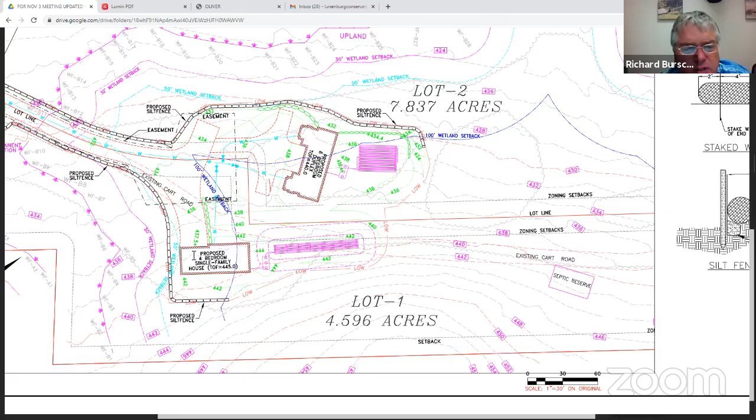But I myself, because you've got it right at the 50-foot mark. Right, yeah, it is awfully close. Yeah, and I do appreciate that the site has definitely shrunk and is far less intrusive in that area.

Those are my two concerns, sliding the house and getting an inventory and a planting scheme for the replication area. Matt, have you been out on site and verified the flagging? Yeah, the flagging's been verified a long time ago. Okay, my question is on the replication area.

Paul, are you looking to remove the trees, or is that replication area going around and keeping the canopy? Well, I'll go back out there and see. Some of them might be well suited to stay, especially on the left side of that area where it's already low. We might be able to leave a bunch of those trees. On the right-hand side and on the north, we've got to cut the grade down too much, and in that area they're mostly saplings and multi-stem. Some of these are like 1.5-inch saplings with 5 to 7 stems coming out of the ground, and those are just going to have to be removed because the grade's got to be cut down.

Okay, and did you send these revised plans to the DEP regional office? I'll have to go back and check, I'm not sure, but I'll check on that. Yeah, can you make sure you do? You can send it directly to Kim Roth. They've been especially clamping down on follow-up plans, so you want to make sure you get that in there. I will check on that. I'd like to see if that has been submitted, if DEP had any follow-up comments.

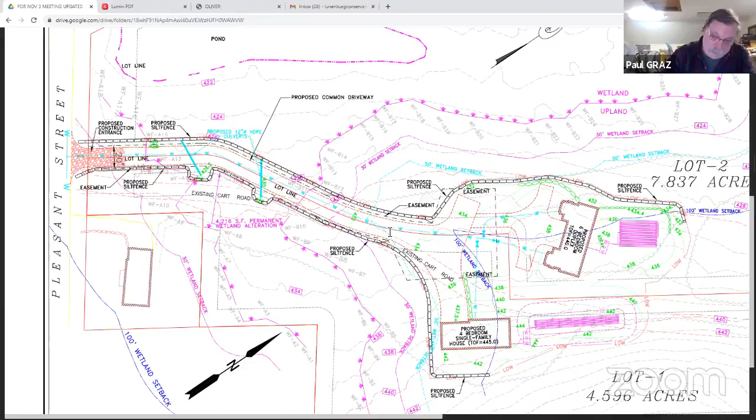So the driveway from Pleasant Street in through the crossing hasn't changed, that's pretty much in the same location. It actually slid a little bit to the south. I believe the former road was roughly 58 to 60 feet north of the abutting property corner, and that's because we had big sweeping radiuses required by the subdivision regs, so that pushed the road more to the north.

I would have loved to pull this driveway to the south and stay on that existing cart road, but they've got a requirement that the common driveway be centered on the lot line for the lots they're serving, so that pushed me 50 feet north of the property line. So the road's a little further south than the former one, but the former road had an angle on it, and I had to keep a 50-foot radius on the center line to the existing property corner. So it's basically in the same place.

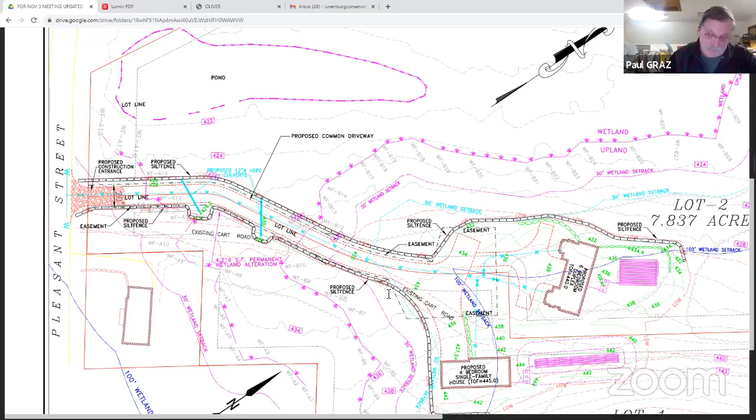It's smaller, it's narrower, and not as high also. Can we get the center line staked every 20 feet or so out to the intersection here? Yep. And then get the corners of the houses and the corners of the septic staked? And we can zip out there on a Saturday and take a look, get a new perspective on where it's all going.

So driveway, 4 corners of the 2 houses, and the 2 septic systems. Okay. Then just let Matt know as soon as you get that completed, and then we can go out and do another site survey. All right, if they could maybe put a couple stakes by that replication area too. Not a bad idea.

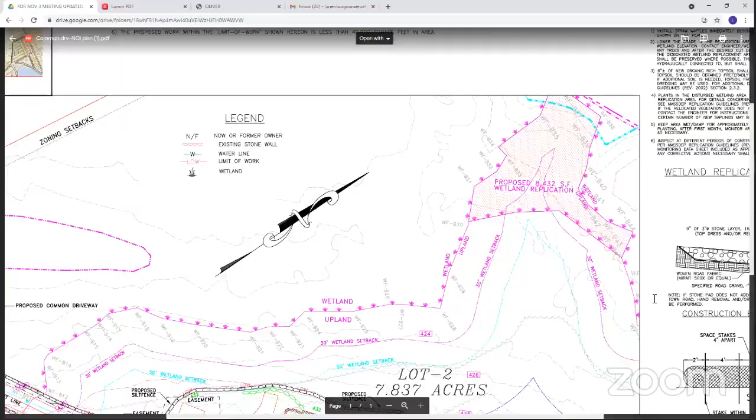Rich, I had a couple of follow-up questions. Okay, so if you can take Paul and get a couple stakes from the corners here, just to give us a little bit of an idea of where that replication area is. Yeah, we'll flag it and stake that line across it. Okay, perfect. And Matt, you had some questions.

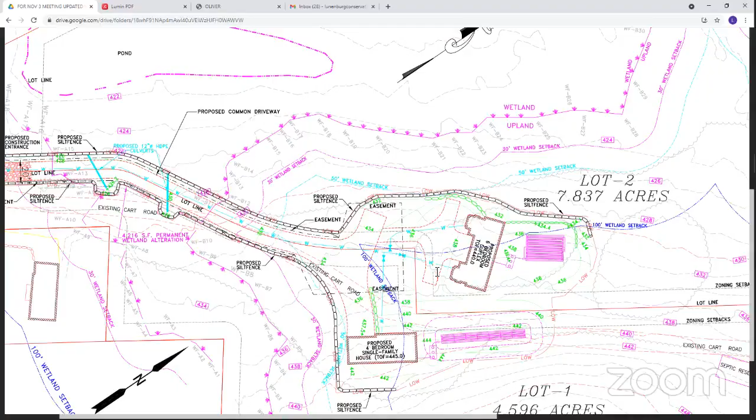Yeah, Paul, has the septic system been approved by the Board of Health? Not yet. They've been designed so that we'd have the grading, so we'd know what the grading is going to be, but we haven't submitted them yet. We just got the signed approval Monday night, so we'll be moving ahead. So has Jimmy witnessed the perc testing out there? Yes. Okay, and what is your status with the planning board?

Status with the planning board is that the ANR has been signed and we withdrew the— actually I wasn't at that meeting Monday night, but I believe the subdivision was withdrawn.

And you said you were trying to stay under the acre of disturbance. Where are you at right now? Really close. We're at 40,000... less than 40, but probably 39,999 kind of thing. So do you have to stay under 40,000 or 1 acre? Well, it's actually 43,560 we have to stay under. So I can use a little bit of that to help move the house over. So you've got a little bit there to work with, not quite 10%.

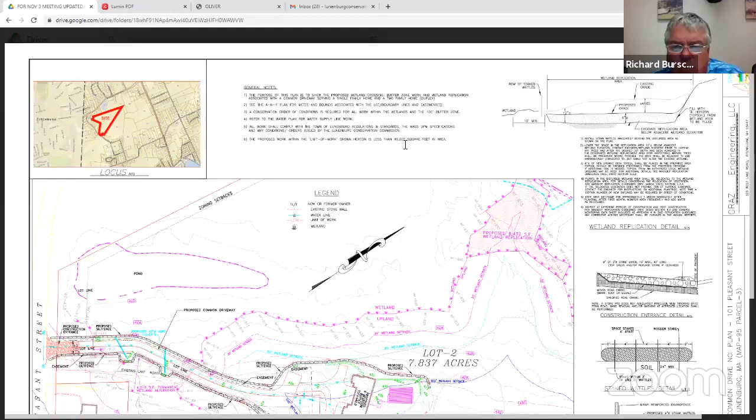Although it says here that you're under 40,000, so you've got 3,500 to 5,000 square feet still to deal with. So you've got some space in there. We can move this house out.

Yep. Mr. Rabbit, I think I heard you. Oh, yeah, I raised my hand, but I don't know. Don't worry about it. I'm not worried. Hey, Paul, just...

Oh, no, it's not for parking. It's for vehicle turnaround, delivery trucks or what have you. So that area and the driveway that approaches the other house will be the turnaround, as opposed to having a big bulb supporting both of them. Now does that affect your 1 acre, that little cutout section? Oh yeah, everything inside that limit of work line, and actually, for the most part, the silt fence line. Yeah, if you eliminate it and let them turn around in each other's driveway, you'd pick up what is it, 20 by 40 or something, 800 feet? Yeah, but we had it sized so large delivery trucks and emergency vehicles can turn around there.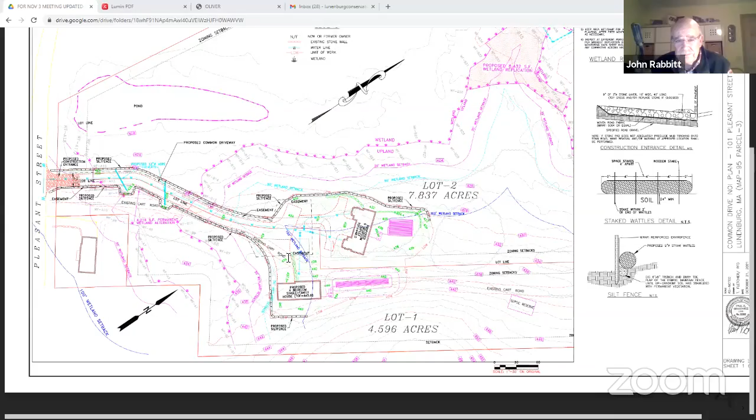Oh, thank you, Jack. Any other questions or comments from commissioners? Thank you, Mr. Chairman. Any questions or comments from the public on 101 Pleasant Street? Andrea Adams.

Thank you. I guess I would say at this juncture you've got a few more pieces of information you need to be able to make an informed determination on this particular layout. But I would just direct the board's attention and the applicant's attention to my comment letter of June 14 of this year, under item number 2, specific comments: item A, about wetland crossings; B, about the information for the wetland alteration of any type; C, work in no-touch or wetland replication needing to be monitored by a qualified individual—I call them a wetland scientist in my letter.

More narrative if you need it on the erosion and sedimentation control. And that any work adjacent in the buffers and no-touch, if it still exists, could be overseen by a clerk to take the burden off of Matt, although that's entirely up to you and Mr. Morrow as to how you want to allocate your time to this project. So I would just make those brief comments on this particular design, and I look forward to seeing what it looks like when you get the information you need, particularly on the wetland replication with regard to species.

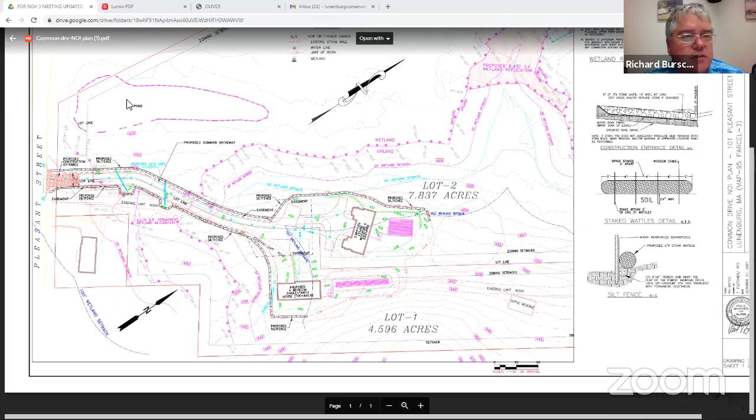We have a release of chapter 61A. I don't know if everybody's had a chance to review that. I did review it, and it does not come close to any of the requirements for the conservation to recommend it, although taken in totality it does cover a fair amount. Where are they, Matt? I'm not far back enough. Here we go.

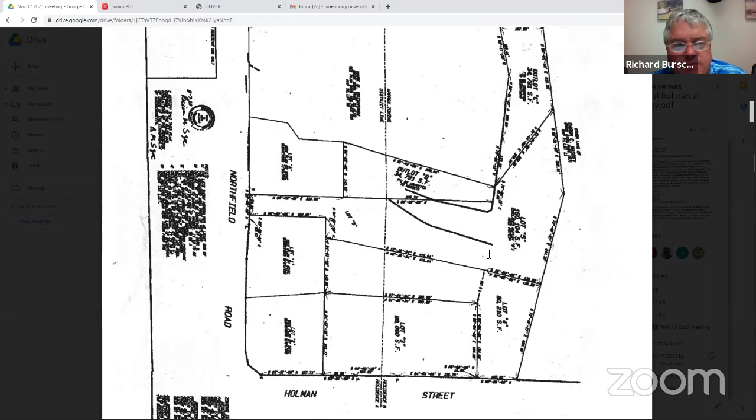So it's properties owned by Darren Massey on Holman Street. For everybody watching, the Lane property is down Holman Street on the low side. This is the intersection going towards North Cemetery and then Northfield Road, so it's these lots in through here. Looks like we got lots 1, 2, 3, 4, 5. And where they're not contiguous with any of our lots, I personally don't see us recommending moving forward and exercising our rights at this time. Does anybody else have any questions or comments? I would agree with you, Rich. There's nothing there that we can attach to.

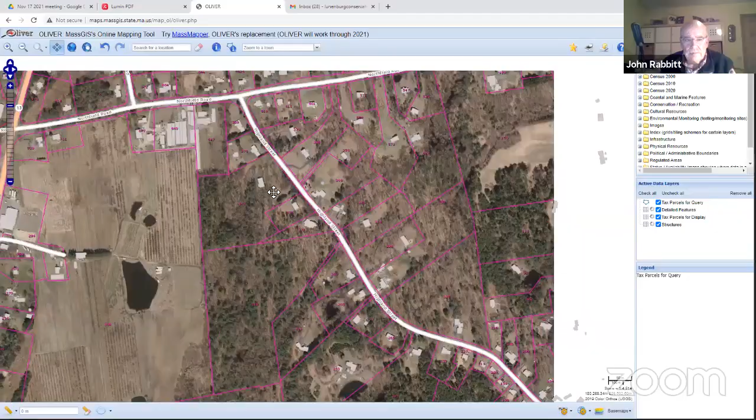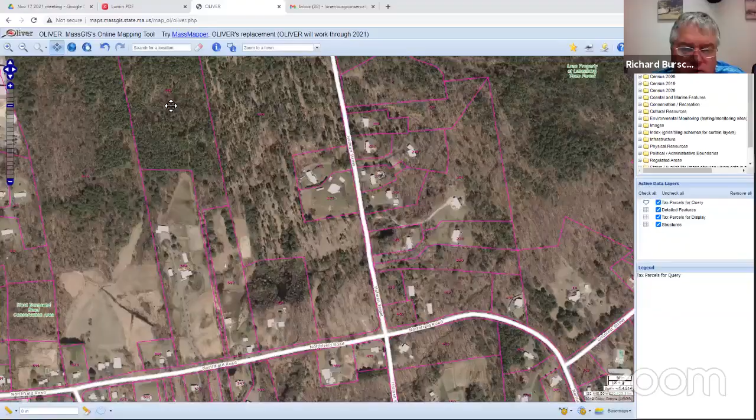So it looks like it's this chunk of land right here. Then this stripping out through here, this is North County Land Trust, so it doesn't really abut any of their properties. And then this is the Lane property out on this side, out here. Any other questions or comments from commissioners? Questions or comments from the public? Seeing none, I guess I'll accept the motion to send a letter to the selectmen that the Conservation Commission is not interested in seeing the town exercise its rights of first refusal on this property. So moved, Jack. Have a second? Second, second by Jeff. Any other discussion?

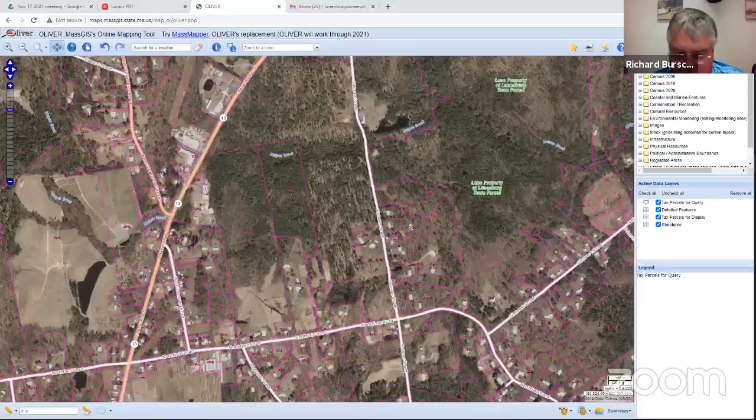All those in favor of the motion, roll call vote. Mike, Katie aye, Jack aye, Jeff aye, and I for myself. All right, you've got that, Matt? Yes. All right, so you'll let Heather know? Yes.

All right, and what do we have for trail planning at 260 Howard? Yeah, I'm going to leave that to Bob, that was Bob's baby. I do know that he sent an email out that he wants to do a site walk on 260 Howard to go over the trails, but probably let him follow that up on email. Okay.

And you want to bring us up to speed on 123? Or at this point we'll probably leave it for Bob when he's here. Actually, there are two items on 123. I'm going to need you guys to ratify the monetary amounts. The first one is for pest control. I'm going to need a vote for a total of $600 to be spent for a mouse clean out and an insect spray around the house. I've already had a PO placed on that, and I'm going to need another $800 for septic system pumping. I had two pumpings done, and that's going to need approval so I can go ahead and pay those. The reason why I have to do it this way is we don't have a specific Hollis Road line item, and I'm working with Bob and Adam Burney to examine that particular issue. We don't have a specific budgetary line item, so. All right, any questions or comments from commissioners?

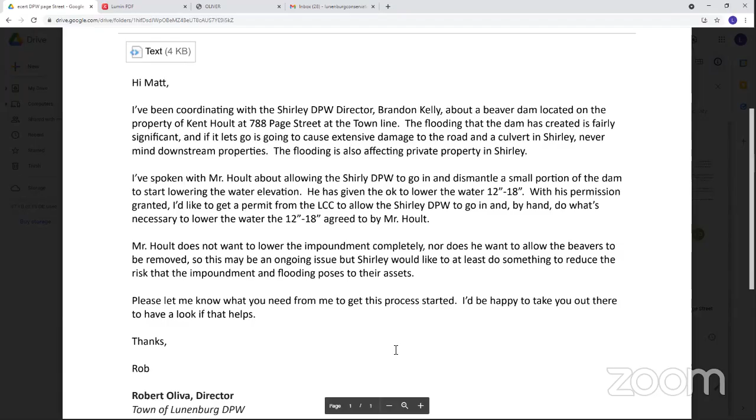I issued an emergency permit on Page Street, on the upper end, right on the Shirley line. We've had a lot of beaver activity there, but they started really plugging the culvert, so I gave Rob Oliva permission to go in based on the emergency.

So moved. Jeff, second. Second. Jack, second. Any other discussion? All those in favor of the motion: Mike, aye. Katie, aye. Jack, aye. Jeff, aye. Aye for myself.

All right, Matt, you want to bring us up to speed quick on 615? I believe Jack and Mike were out on site as well. Right, Matt, you first.

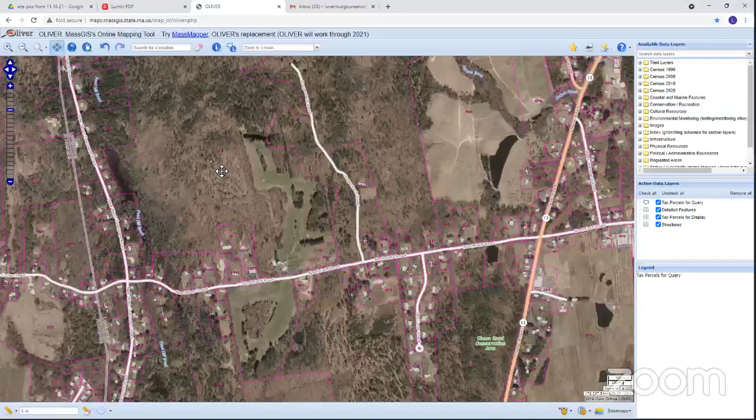Okay, so back at the end of October, we had—actually it may have been sooner than that, I don't have the timeline in front of me—we had an issue where we had a heavy rainstorm and silt started coming off the site going on from 615 Townsend Street to 164 White Street, also known as Page's Pond.

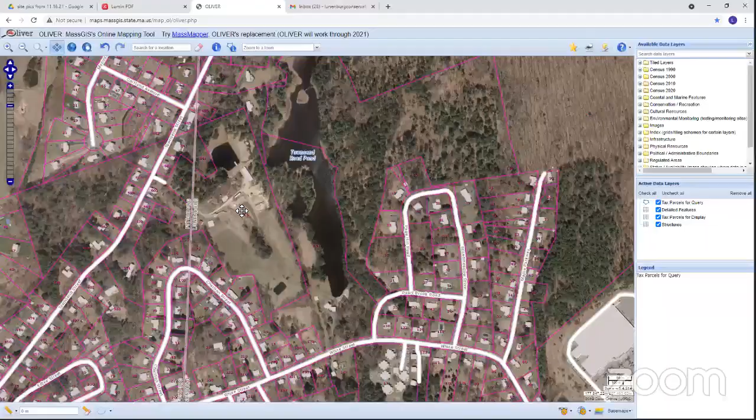It started causing a silt event again. I did issue another enforcement order—this makes number three. I went out to the site with Mr. Barros and instructed him to put up a wood shavings berm in an arc, which he's done. It did appear, based on follow-up inspections with Jack and myself, that the shavings berm appears to work, at least for now.

That is a temporary item meant to take care of this immediately. There is stabilization work that's going to need to be done. Also, in examining the area—I don't know if Val or anybody else is here for Val—I need to consult with the building inspector on other items on the property. A lot of the work he's doing related to the agriculture on the site was based on some earthwork that he was doing.

It looks like there may be some earth removal activity going on over there, not just necessarily soil relocation. So I have to talk to Casey—he's been out for the last couple of weeks, he's due back on Monday. I need to speak with him about investigating that area.

And if that's so, it would go outside the agricultural exemption, even though that area is out of the buffer zone. We did have the siltation event coming from that area, so we're going to need to come up with a plan to control the silt. That could be done partially through enforcement, partially through an earth removal permit if required. We'd also have to evaluate whether it's under or over an acre—it may need a stormwater permit as well.

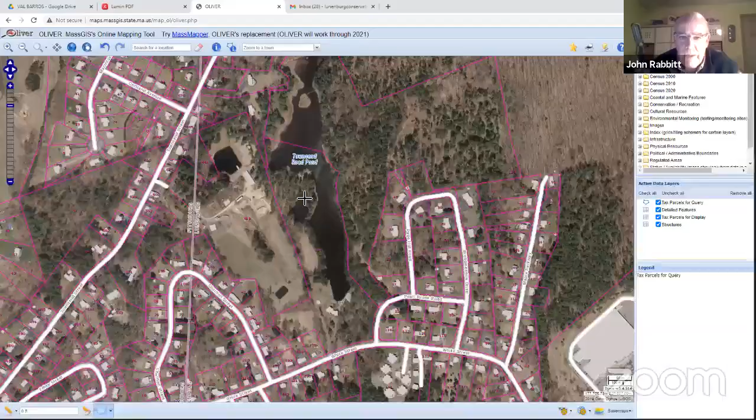So, yeah, there's other activities going on—that would be it, Rich, right in there. It was all excavated out, and there were no controls in there. And this is excavated down to the pond? There's a small stream that carries that water down into that pond, yes.

But it was noted that there really wasn't a lot of silt—there was some, but not much, because it's coming out of a pipe, moving through sand. But again, there were no controls put in place for when a rain event does occur, and the embankments that were carved away will wash into that stream.

It also appears—Matt is absolutely correct—that there should be, if there isn't already, another permit going on, because there's considerable excavation. They're sorting the rocks, the piles are considerably bigger, and there's a lot of activity going on.

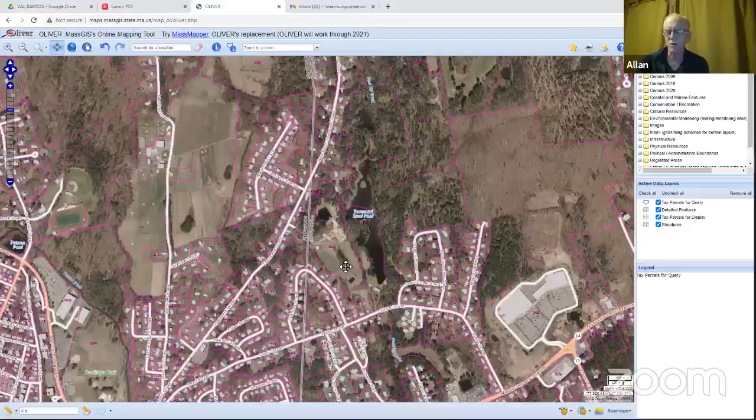Mr. Foster, did we miss anything with regard to any of your other observations? Have the stockpiles grown larger? Absolutely, yes. And I don't know where all the material came from, but they clearly are larger.

There is the area of wetland fill that you talked about at the very northern end on a tributary stream. My own take is that that's beyond my expertise to understand how to go about remediating the issue that was created there.

Attorney Nyland did suggest requesting, or more to the point requiring, that Mr. Barros get a wetland specialist to come up with a remediation plan and put this into peer review, that the commission would hire a separate wetland scientist and let them work out how to go about taking care of this problem. That's in your hands to make that decision, but that was what the attorney recommended, and he works in this realm day in, day out.

So again, it's outside my expertise. I just know there's a problem there that's going to create silt for years to come, and I think it's a specialist job to try and figure out how to solve that. I thank you for your time.

Jack, can you hold off on the discussion please? Rich just got kicked off, I'm on the phone with him. Oh, okay.